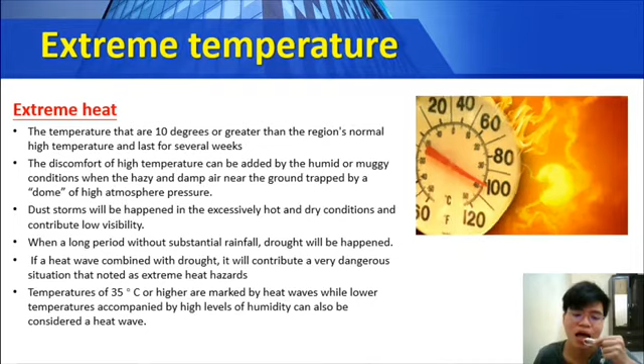Secondly, I will define extreme cold. This is the temperature that is at or below freezing for an extended period of time, whereby the freezing point can be labeled as 0 degrees Celsius. Normally, these extreme cold outbreaks are part of winter storm or cold snap events and occur at any time of the year.

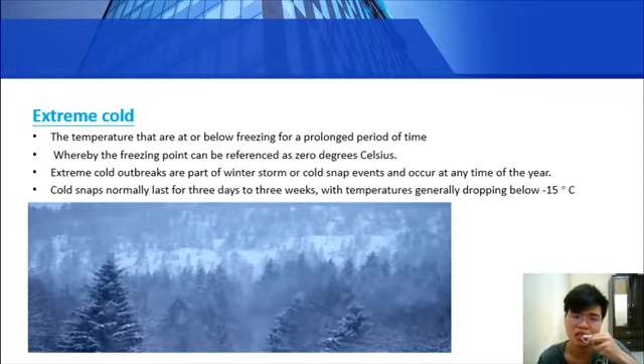These events last for 3 days to 3 weeks, with the temperature generally dropping below negative 15 degrees Celsius, so it can be said that it is really an extreme temperature that is a very cold temperature.

Moreover, I will further present extreme temperature and why it will happen. Extreme temperature happens based on some factors. First is the country's regions based on latitude and altitude.

In the mid-latitude regions, especially near the interior of a large continent, the winter minimum temperature will drop below negative 20 degrees Celsius and above 40 degrees Celsius for several weeks without the moderating influence of oceans.

This normally happens from June to August and December to February. This extreme low temperature can occur at any time between late fall or early spring in the polar regions and the high mid-latitudes, while the extreme high temperature from late spring through early fall is widespread in the lower mid-latitudes.

In addition, high altitude areas are also subject to extreme low temperature and will occur for 9 months or more during the year in alpine regions, usually above 3,500 meters, dependent on the latitude.

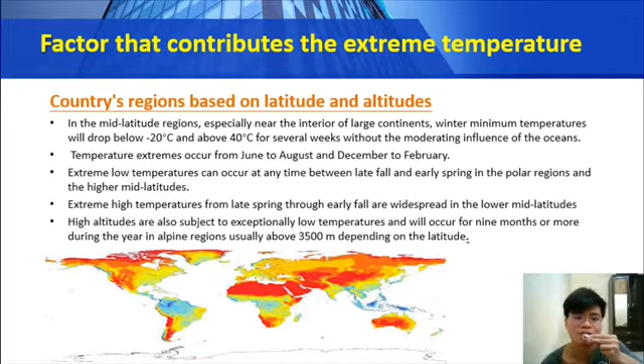Secondly, another factor is the region based on what the population is accustomed to. Generally, the population located in urbanized areas will face the urban heat island effect. This effect normally occurs in overdeveloped areas, which contribute to high temperature at daytime and remain hot at nighttime.

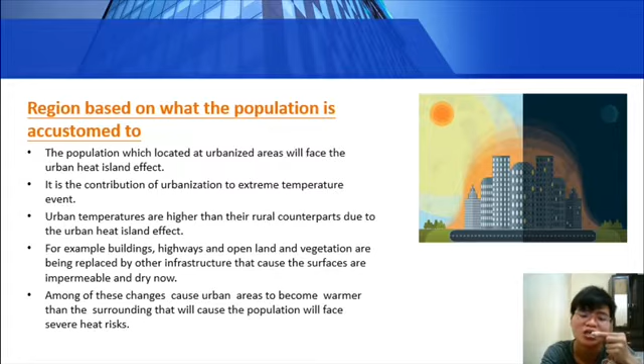This is caused by buildings, highways, and open land where vegetation is being replaced by other infrastructure, because the surface is in dry and hot condition. Among these changes, urban areas will become warmer than the surrounding areas, causing the population to face severe heat waves. So it concludes that urbanization will contribute to extreme temperature events.

Thirdly, the climate change factor is one of the factors that will contribute to extreme temperature. This is due to cumulative greenhouse gas emissions such as carbon dioxide, carbon monoxide, and sulfur dioxide. Among these climate change factors are extended growing seasons, high temperatures, and the possibility of more intense, less frequent summer rainfall.

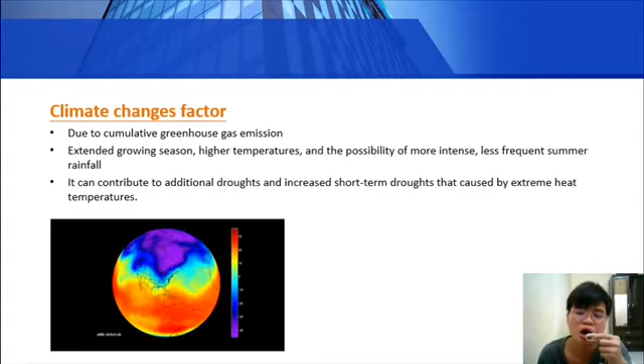By this factor, it can contribute to additional droughts and increased short-term droughts caused by extreme heat temperature.

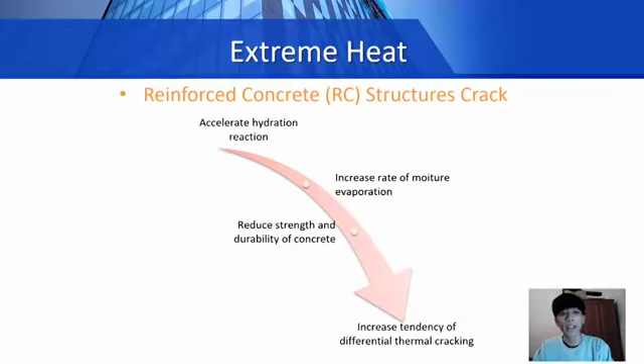First and foremost, extreme heat may lead to cracks in reinforced concrete structures. Extreme high temperature affects the strength of concrete. It accelerates the hydration reaction within the concrete and increases the rate of evaporation of moisture. Therefore, the strength and durability of the concrete are reduced due to the decrease of water-cement ratio. This situation leads to an increase in the tendency of differential thermal cracking.

Secondly, steel structures will deform at extreme high temperatures. At high temperatures, steel will distort and deform. Failure to allow for these joints and changes of direction will cause buckling, distortion, and cracking.

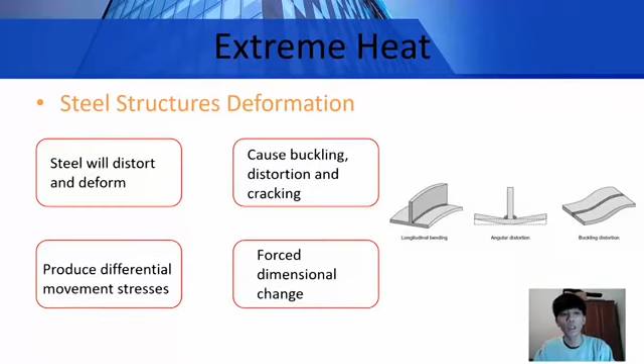Decking and supporting materials which have different moisture or temperature movement coefficients will produce differential movement stresses at the interface, leading to forced dimensional changes.

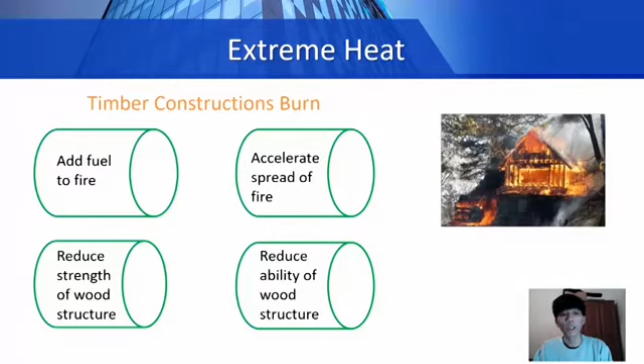Thirdly, timber construction may burn at extreme high temperatures. Fire may occur in wood buildings. As the building burns, the wood adds fuel to the fire, accelerating fire spread through the building. In the end, the fire will reduce the strength of the wood structure and its ability to support the building loads.

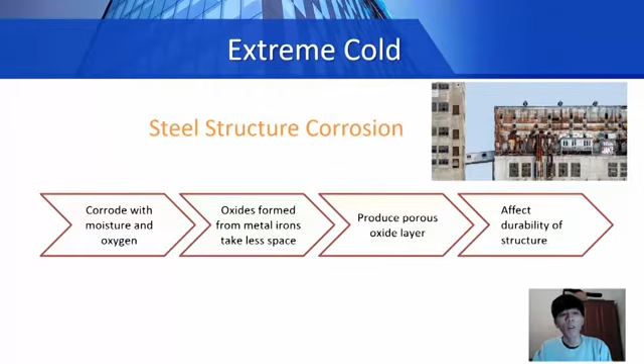Next, steel structures will corrode at extreme low temperatures. Steel corrodes in an environment with moisture and oxygen. The oxide formed from some metal ions takes less space than the original metal. This produces a porous oxide layer which allows oxidation to continue into the body of the metal. Therefore, any holes in the coating or variable thickness will affect the durability locally.

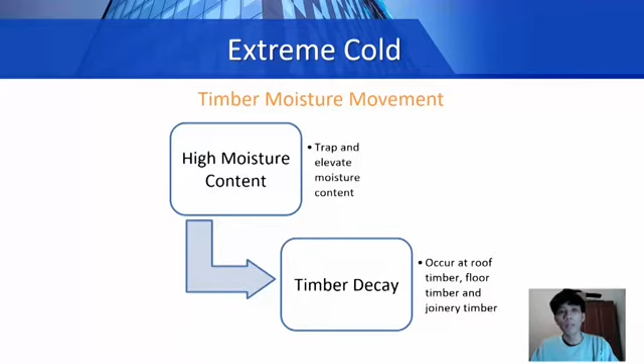Besides that, timber gains high moisture content at extreme low temperatures. It will trap and elevate moisture content in buildings. This condition may result in timber decay, which may occur at roof timber, floor timber, and joinery timber such as door frames or window frames.

Other than that, condensation may occur at extreme low temperatures and lead to failure of wall joints. Initially, the structure loses heat due to low temperature in the surrounding area. Then, airspace in wet material is replaced with water. This happens when the inside of the building becomes hot.

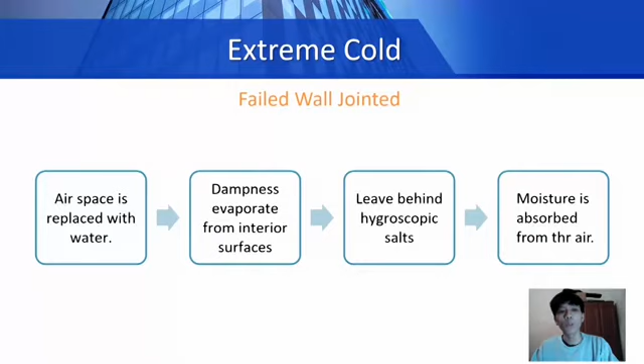Dampness can evaporate from interior surfaces, leaving behind hygroscopic salts. These can absorb moisture from the air within the building, which can add to the general dampness problem.

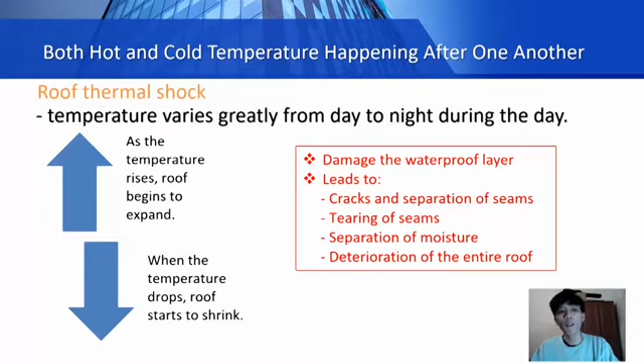In addition, failure and defects also occur when both hot and cold temperatures happen after one another. An example of this defect is roof thermal shock. Thermal shock is defined as the temperature varying greatly from day to night. As the temperature rises, the roof begins to expand. Then, when the temperature drops, the roof starts to shrink. This thermal expansion and contraction can damage the waterproof layer, leading to cracks, separation of seams, tearing of seams, separation of moisture, and deterioration of the entire roof.

Lastly, there are three system defects at different extreme temperatures. At extreme heat, the electrical supply system may be affected. Cables get overheated when the temperature of the surrounding environment is high. This may trigger an electrical fire as well as cause malfunction of the electrical system.

At extreme cold, building air conditioning systems may be affected. In winter, the interior of the building is more humid than the exterior, so water vapor tends to diffuse from the interior to exterior. The migrating moisture may reach a location in the wall where the insulation is at the dew point, and condensation occurs. This condensed water saturates the insulation, rendering it useless as a heat loss barrier. If condensation levels are extreme, wooden structure members can deteriorate or steel ones can rust, compromising the structural integrity of a building.

When both hot and cold temperatures happen after one another, domestic water supply systems and wastewater systems are affected. There is a large difference of temperature between day and night. This difference brings expansion and contraction to piping systems, which exerts force and pressure on the piping system. The piping system may leak. In addition, all pipes placed in walls, roofs, and floors may corrode or rust, and the heat loss of the hot water supply system will increase.

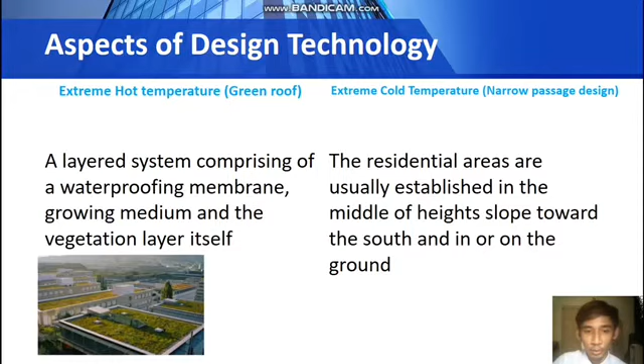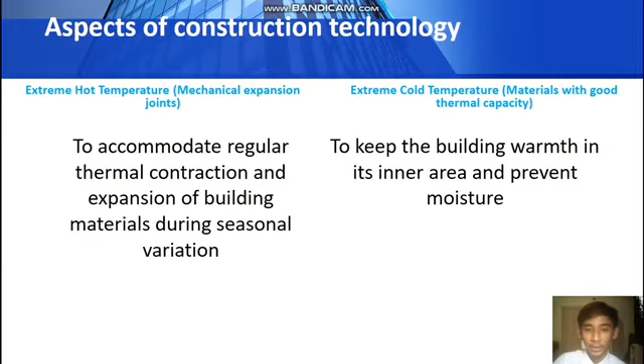Meanwhile, in extreme cold temperature, materials with good thermal capacity are used to keep the building warm in its inner area and prevent moisture. So the body of these buildings is from stone, wood, mortar, adobe and bricks, and the roofing is basically from timber and cork. Next is the expectation to overcome the problems due to extreme temperature in the future.

Now the first thing we can expect is using the Bauhaus German design. Buildings in Tel Aviv also benefited from this Bauhaus German design, which comes from the Bauhaus School of Architecture and Design. The Bauhaus penchant for flat roofs, for example, has proven to be useful as they reflect solar heat. With new technologies such as the advent of solar panels emerging over time, flat roofs have continued to be popular in hot urban centers.

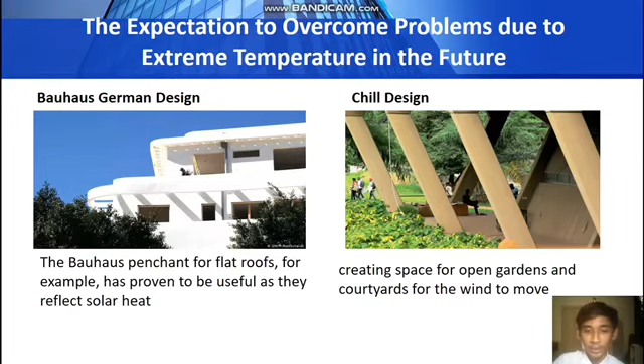Next is using the ancient design. The street temperature in Abu Dhabi's Masdar City neighborhood is up to 20 degrees Celsius cooler than the heat in the surrounding desert, as a wind tower channels cooler air from the sky and pushes it down to form a cooling breeze, which is copied from the ancient city of Muscat, Oman.

And next is using a passive building design. Passive building design incorporates features that minimize the impact on the environment, such as smaller windows, overhang roofs, spaces for solar panels or rooftop gardens where the rain can cool off the building while feeding the plants that offset carbon emissions.

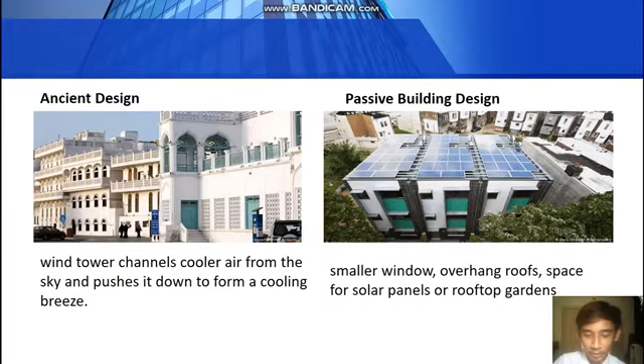So right now I'm going to present about the issue, which is the issue in Malaysia and the issue in another country, which is Denmark.

So in Malaysia, as we know, Malaysia has heavy rainfall and warm sunshine all year round. So extreme weather condition is one of the factors affecting construction. If prevention is not done, the extremely hot condition will not only affect workmanship but also cause crack lines in walls facing sunlight under high temperature.

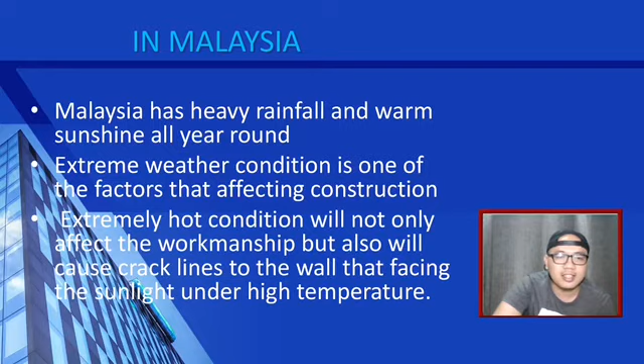So let's move to Denmark. In Denmark, we can relate in particular to the limitation of snow and storm damage. With regard to the reinforcement of existing buildings, autonomous adaptation will be limited if owners are not aware of the weaknesses in the bearing elements of the building.

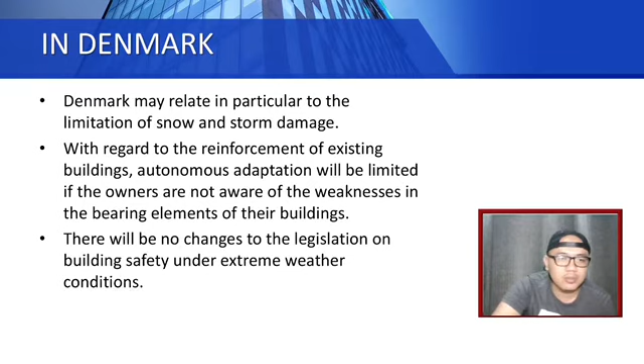So if the prevention procedure is not considered, there will be no change to the legislation on building safety under extreme weather conditions. So for the conclusion, structural defects in a building can occur over time due to climate change, for example extreme temperature. So the application to overcome this situation is, for example, in extreme heat, the expansion joint can help absorb the natural thermal contraction and expansion of the building material, while in extreme cold places, the material selection can follow the materials used in traditional buildings in cold and mountainous regions.

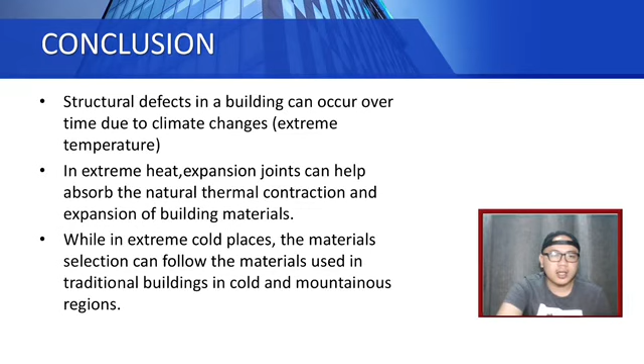So in future, existing buildings may need to be informed of the typical weaknesses of the bearing elements, along with instructions for their remediation. In the same way, instructions on new construction solutions may also be required, particularly for vulnerable buildings, to reduce indoor temperature during extreme heat waves.

So finally, there might be a need to notify construction technicians of recommended future-oriented design parameters, for example concerning maximum snow load and wind speed, temperature and duration of future heat waves, and the maximum precipitation intensity a building can withstand.